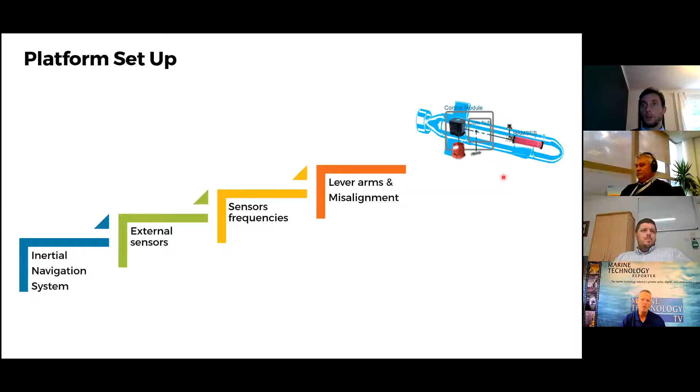Now you can go to the trajectory. So what will be my survey pattern along my mission? You define a trajectory and we generate navigation sensor data along this trajectory. A trajectory starts at an initial position with angle and speed changes. And once the user has declared this trajectory, we add some information to have a more precise trajectory definition.

And finally, we generate some perfect data along this trajectory for the internal sensors of the IMU, the fiber optic gyroscope and the accelerometer, with all the compensation required. And we also generate external sensors, whether GNSS, USBL, or other aiding sensors.

But that's not the end. Obviously, here it's perfect data. What we look for is a simulation result which is really representative of what will happen at sea. All the sensors have some specificities that have to be taken into consideration to have simulation results in line with what could happen at sea. So here we are going to add realistic errors.

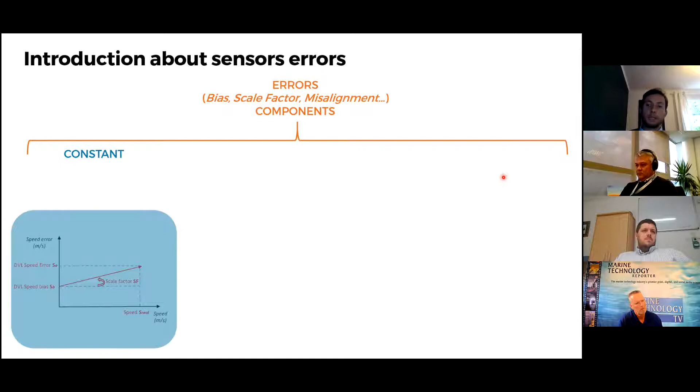And just a small word about the type of errors. We can mention bias, scale factor, misalignment. They have some components; some of them are constant. For example, when I have a DVL, an acoustic speed sensor, if the vehicle is purely static, will my DVL tell me that I'm static? They also have some random components. Typically, an acoustic USBL system can have this type of white noise error component. And some of the errors are time correlated.

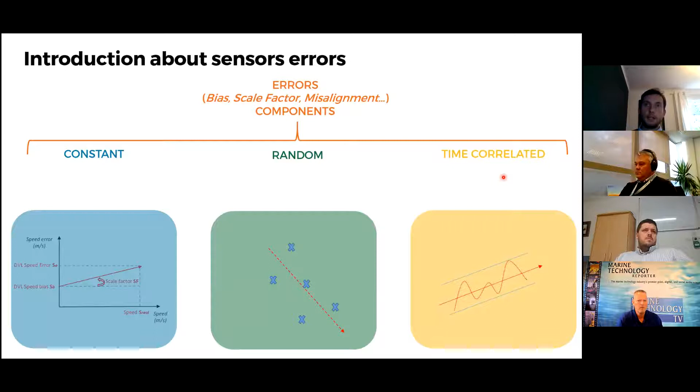So just to say that when we start from the perfect data generated over the specific trajectory and we want to arrive at a simulated value, we perform several operations. At each time, for each sensor, we inject realistic error based on error models that we develop. And we find again here the different types of errors that we mentioned before. So that's how we achieve a simulation which is really representative of what will happen at sea.

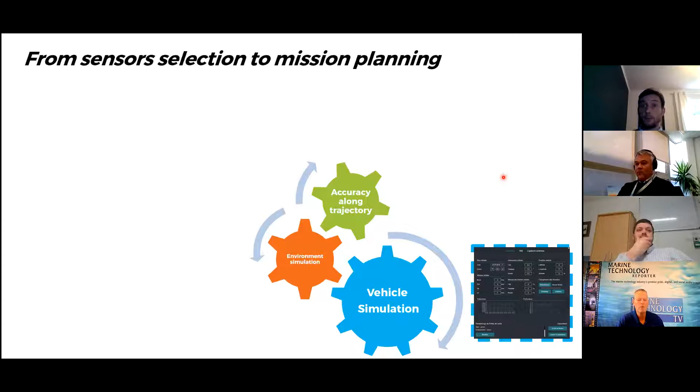The benefit of that is obviously that I can perform my vehicle simulation: the navigation sensor architecture on board my vehicle, and, very important, the specific trajectory of my vehicle during navigation, and the availability of the aiding sensors during navigation. Maybe I can have some loss of USBL sensor, some loss of DVL sensor.

I will also be able to simulate the environment where my survey area is located. For example, if my AUV navigates sometimes in sparse LBL mode, I can upload into our simulator the bathymetry and the sound velocity profile to simulate the area insonified by this aiding sensor. So here we also speak about environment simulation.

And finally, I will be able to see the accuracy of my navigation all along the mission. That means I will know if the data I collect during my mission will have the proper level of accuracy when it comes to georeferencing those data.

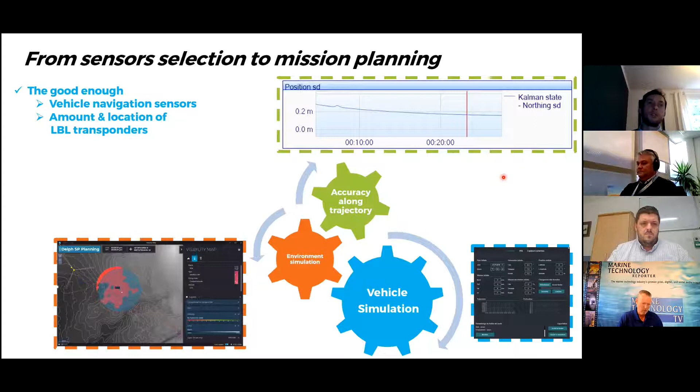So, to sum up, a simulation solution is really about selecting, upstream, the right navigation sensor and also the aiding sensors. It's about converging faster on the best navigation strategy.

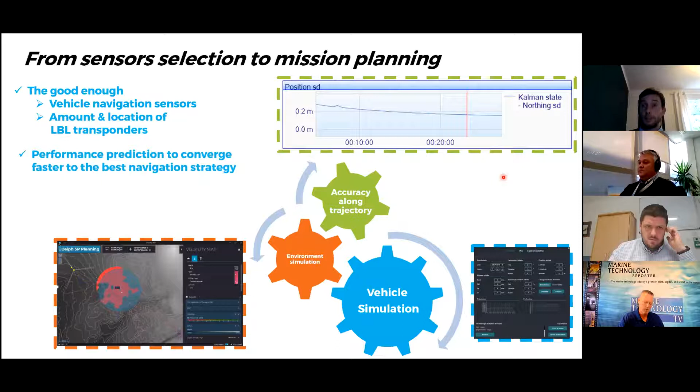And finally, when it comes to developing a new vehicle, we can think, for example, about resident vehicles, which are more and more common in the energy industry. We will help to qualify the vehicles while limiting sea trials. So it's basically helping innovation by reducing the cost of qualification. Well, I think we've arrived at the end of my presentation.

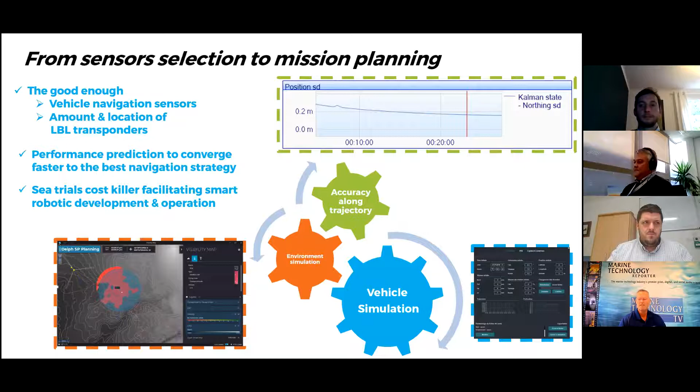So just let me present SBG Systems. We are an inertial manufacturer, so we are providing inertial solutions, mainly based on MEMS technology. And we have designed some miniature systems, and those systems are integrated quite often with various sensors for survey purposes, especially in the marine industry for hydrographic survey. And we have some customers that are surveying in more and more challenging areas where positioning can be problematic even when we are on the surface with some GNSS reception.

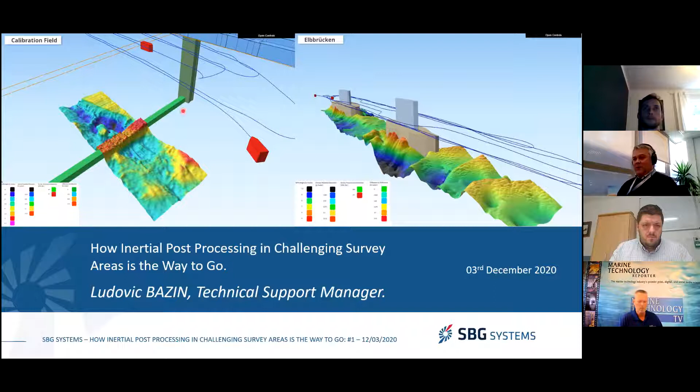So I'm going to present first how we reach a high level of accuracy through post-processing. Most of the time, post-processed kinematics can deliver absolute centimeter precision using GNSS phase and range measurements by a double difference algorithm. To achieve that, you need to use a base station that can be either a single base that a user has installed, or some source of base stations from CORS. And the advantage of post-processing is that you can perform offline processing, meaning that you don't need any communication links while performing your survey.

The other advantage of post-processing is that you can have absolute accuracy of your base station coordinates, because you can check and control them through a PPP static position. And also, in some post-processing software, you are able to perform tight coupling, which is a specific positioning and processing method.

So the ultimate performance with INS PPK also improves roll, pitch, and heading performance thanks to different methods. The first one, as I was saying before, is that you can perform a tightly coupled GNSS INS solution, which means that we reprocess entirely a solution using the raw GNSS data and raw inertial data to improve the position. But there is also a forward, backward, and merge processing mechanism that will improve the accuracy, especially in areas where you have GNSS outages and in rough areas. So it improves position robustness in case of RTK or GNSS outage, and it also greatly improves heading in mono antenna setups with MEMS systems.

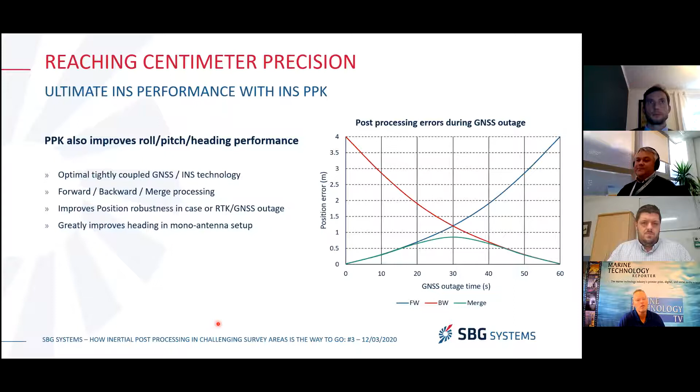So one of the other advantages is that you can extend your RTK capability with post-processing, thanks to different methods. First, precise point positioning, which is commonly called PPP. You do not need any base station to compute a solution with that. You can have worldwide and free of charge corrections that are available after your survey. But one of the drawbacks of this correction is that you need a convergence time of about 30 minutes to reach centimeter accuracy. So you have to think, when you are performing a survey, to have at least 30 minutes of acquisition before being able to use the data set for survey.

The other method to extend those capabilities is to use a virtual base station concept, commonly called VBS. This method consists of using multiple base stations around your survey area. And the advantage of this method is that you can have base stations up to 100 kilometers from the area you are working. We model and map atmospheric disturbance at the rover location thanks to this network of base stations. So you can reach RTK positions, centimeter precision, with an RTK-like convergence time. So that's very efficient in that case.

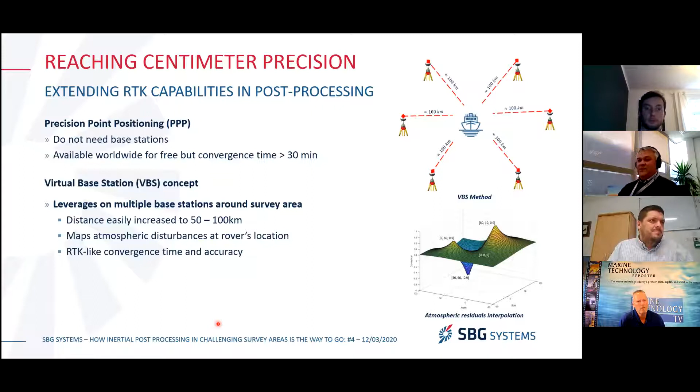So this is an example of how we handle virtual base station in our post-processing software, Qinertia. The advantage is that it's ideal for long corridor mapping, because you can use several base stations, so you can perform a survey over a long distance with only a single processing session. It's highly flexible and robust, because you can mix field base stations that users install, but also base stations provided from a local or area network. And it works with all GNSS manufacturers.

You can mix GNSS manufacturers, and the base position adjustment is automatically performed. Then the software will automatically find the best network for the area you're working in, using the base stations and data sets that are available. It will automatically download the data, and you also have quite a lot of QC indicators.

So we're going to focus now on a case study to show results you can obtain in real time and in post-processing. What we did last year is a survey. We did some acquisition in Germany, in the Port of Hamburg, with one of our partners, MacArtney Germany. We performed acquisition in 3 different areas in the Port of Hamburg. One area was open sky, just to see the performance of the systems in a survey application in an open sky area. Then we did a bridge survey, so we went under bridges and performed acquisition using multibeam echo sounders.

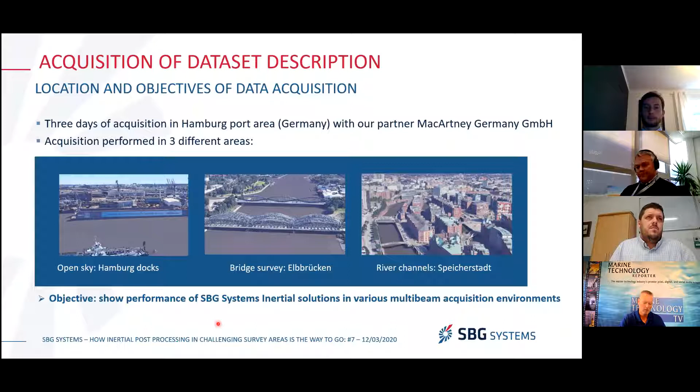So this is a brief description of the data set we used to perform this study. We rigged a small vessel equipped with a multi-beam echo sounder, a SeaBat 7125. We had acquisition software to perform the recording and logging of the multi-beam acquisition. And then we installed four different inertial sensors onto the boat, going from entry-level systems up to a high-performance FOG closed-loop system. So we installed an Ellipse D, an Equinox, an Apogee, and a Horizon.

For this study, we decided to compare the performance of all the sensors to the reference sensor, which here is the Navsight Horizon, a closed-loop FOG system. And we used a post-processed PPK solution of the Navsight Horizon as a reference for position.

But we have also computed and generated multi-beam data using each solution, and we have compared those multi-beam data to the data set we obtained with the FOG and with the FOG post-processed solution. All the results are available and accessible on the SBG Systems website. But for this presentation, I will be presenting only this specific data set.

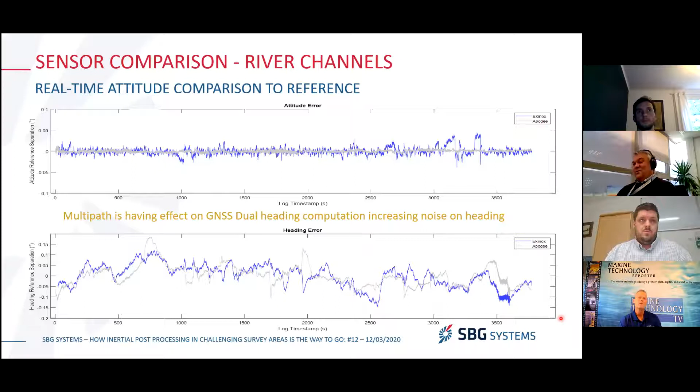But if we start looking at the heading, we see that there are variations of heading in such an area. One of the main points is that the MEMS systems we are using are based on dual GNSS heading computation. And with dual GNSS heading computation, you have the same effect as for position. In multipath, you have some noisy data being computed because it's using the same mechanism of computation. And it impacts the heading results, which are not good enough for some accurate survey acquisition.

If we look now at the results on the position, if we compare the real-time position to the reference system, with RTK corrections broadcast in real time during the acquisition, we can see that there are quite big differences and quite big jumps in position that make the position solution not usable for the acquisition and to produce a proper multi-beam data set.

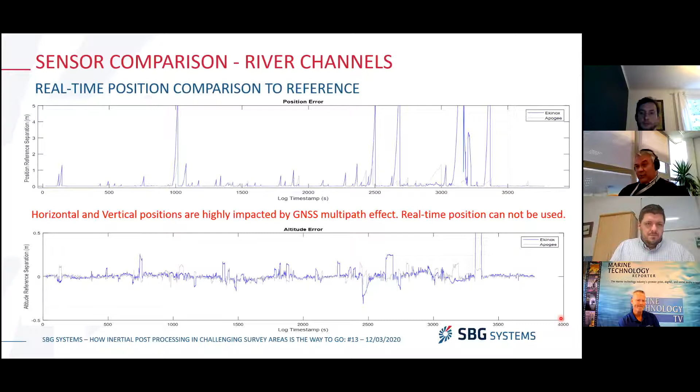So if we look now at the PPK solution and the difference in performance we are having for attitude, pitch, roll, and heading, we can see that there is a visible improvement on heading, but also a slight improvement on the attitude, thanks to this forward, backward, and merge processing. It's really a way to achieve the highest level of performance you can have with any system by performing the post-processing.

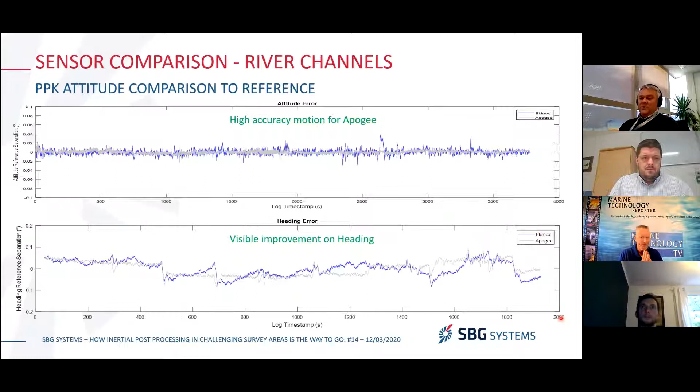If you look now at the position errors, you can see that from several meters of errors, we are down now to 30 centimeters for the Equinox, that is the mid-level sensor. And even for the Apogee now, we have everything below 10 centimeters. So we managed to reach a good level of accuracy by processing the inertial data set for almost all the systems. So it's really a very big improvement for position.

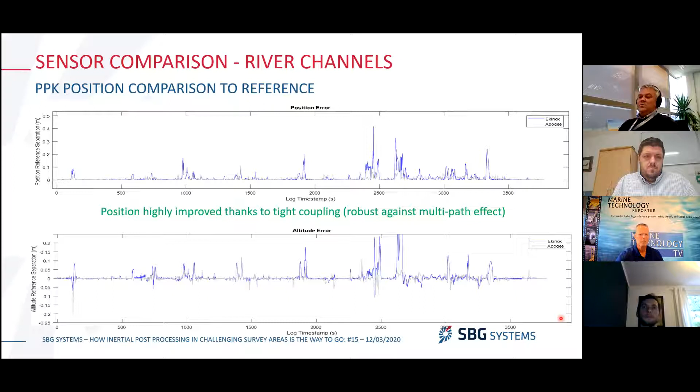This is thanks to the tight coupling post-processing method, that is very robust, especially when you have multipath, and then also thanks to the mechanism of computing a forward and backward solution that also improves the results at the end.

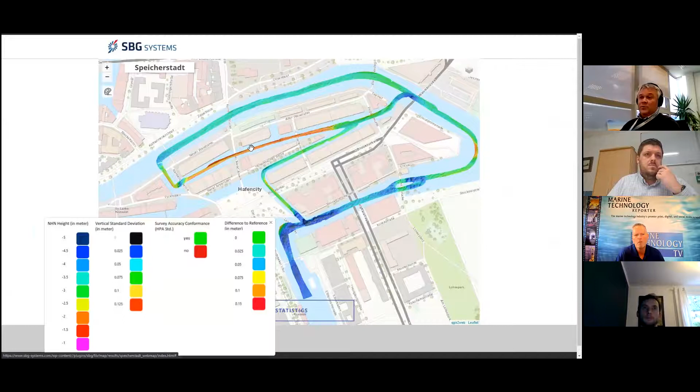So now what I'm going to show you is just the impact on the bathymetry itself, because for most people and surveyors, at the end, they are not really looking at the performance of the inertial sensor itself, but really at what impact it will have on your data set at the end. So we produce the bathy maps on our website, and they are all available. And for each data set, you can have a look at the bathymetry itself, but also standard deviation and conformance, which correspond to some confidence level you can have on the bathymetry itself.

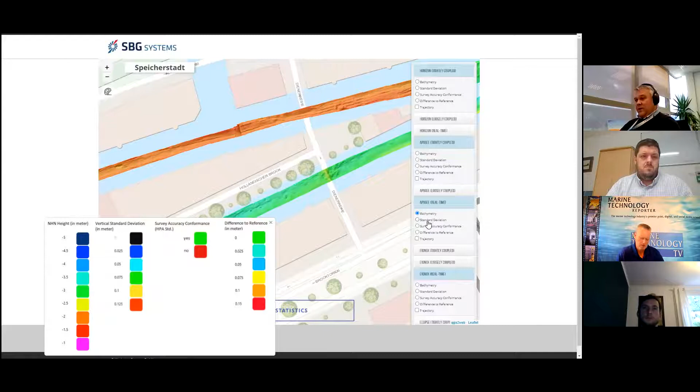So the data set I'm presenting here is the one from the Apogee, which is the higher grade MEMS sensor we can have so far. If we look at the bathymetry, we can see that we have some glitches in real time. And if we look at the standard deviation now, part of the standard deviation is above 15 centimeters, and we have part of the data that are not really usable to produce a bathy map or a survey map at the end. We can also see on the conformance, which is the confidence level you can have on your data acquisition, that you don't have a very good level of accuracy.

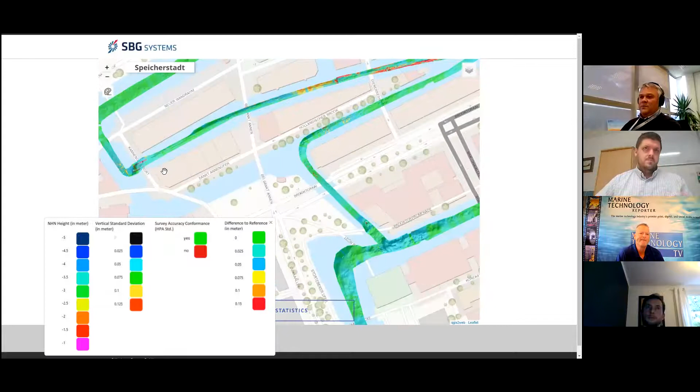If we look at the difference now of the bathymetry towards the reference system, we can see that we had more than 15 centimeters differences in some areas, especially this area here. In most of the areas where we had bridges or other areas where we had strong multipath effect, this happens.

So if we look now at the bathymetry on the same area, but after post-processing the inertial data, we can see that we have a significant improvement on the standard deviation, but also on the confidence we can have in the data set itself. The conformance starts to be very good, and the difference to the reference system is very small, and you can have a fully usable data set that is perfect for such acquisition.

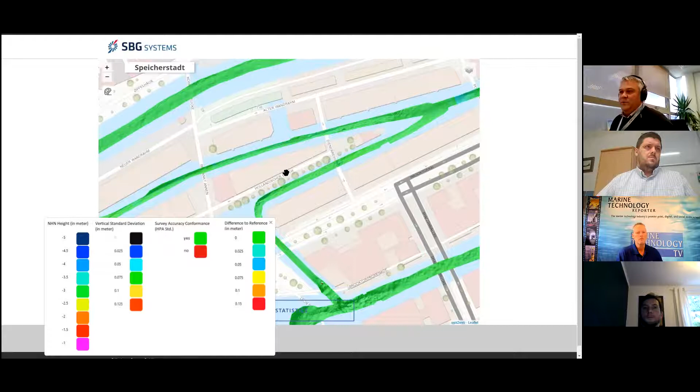So let's go back to the presentation now. So here we have an overall results performance summary of the different systems. We can see that for both systems, the Ekinox or the Apogee, in real time, the motion, pitch, roll, and heading are providing acceptable results. But as soon as we go to the position, the results are a bit too noisy and cannot be used as such for acquisition.

So you really need to post-process the data, especially for the position, to reach a good level of accuracy, and that allows generating multibeam data conforming to the IHO special order. The performance of the IMU is still noticeable, but the post-processing is really a very big improvement for that.

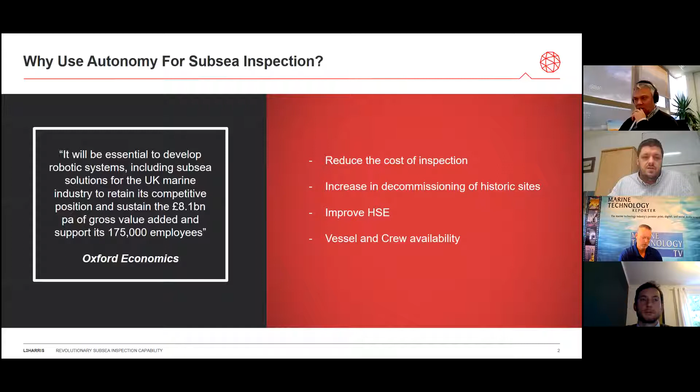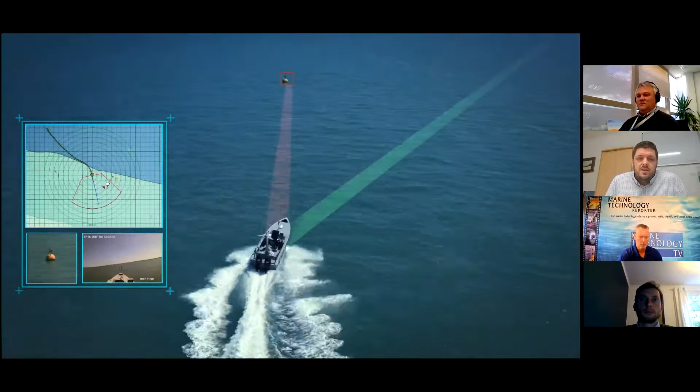So as I say, we've been developing these systems for a number of years, and have an industry-leading autonomy system capable of doing a wide range of things. We're constantly innovating, from just the simple autonomy of remote operations all the way up to advanced autonomy. So you can see in the video here a vessel tracking using camera systems. And then what I'm going to talk to you about today, the Arise system phase 1, is on the screen now. So how do we integrate an ROV into an existing platform and then use that to do useful inspection work?

And we developed a whole range of different vehicles from 3 all the way up to 13 meters, in both the military and commercial world. So mine countermeasures, border security, as well as hydrography and survey.

So to talk a little bit more specifically about what we've been doing. This is a 2-phase program. In the first phase, we did a relatively simple integration, where we took a lot of equipment that we had around a simple winch system, a payload in an existing vessel, and integrated that with about 40 meters of tether to enable us to just go out and prove the concept. How can we, in as simple a way as possible, integrate an ROV into an autonomous vessel so that we can start moving towards this collaborative autonomy?

Because at the moment, we're looking at an ROV that's around the size of a Saab Seaeye Falcon. That's what we've used in phase 1 of the program, and what we're going to be using to do demonstrations early next year. That's traditionally operated off a vessel that's anywhere between 25 to 35 meters long. So going from that size down to 7 meters is a significant step. And if you look at things like carbon emissions, you're reducing them by up to 97% by making that step. This system can use as little as a couple of liters of diesel an hour, which is vastly different to a lot of crew transfer vessels that are using these ROVs for inspection work at the moment.

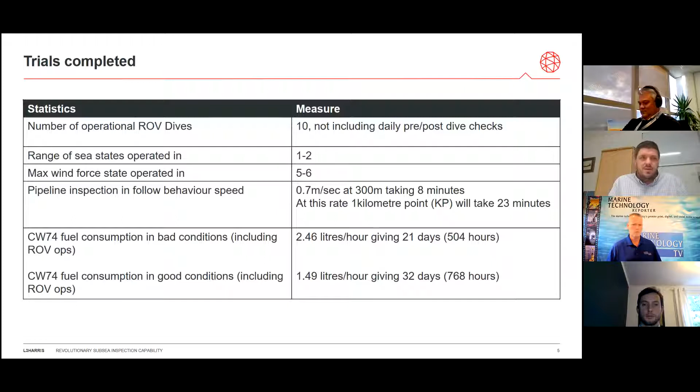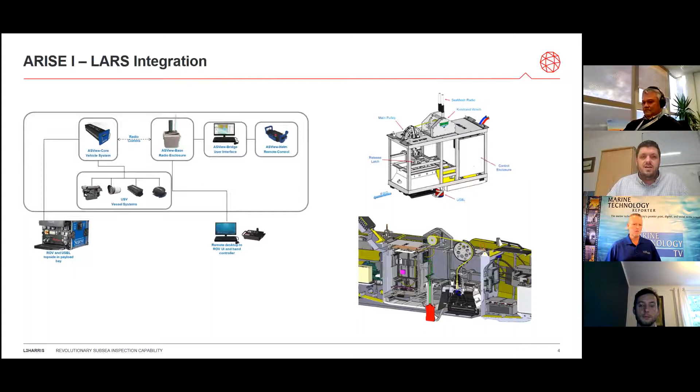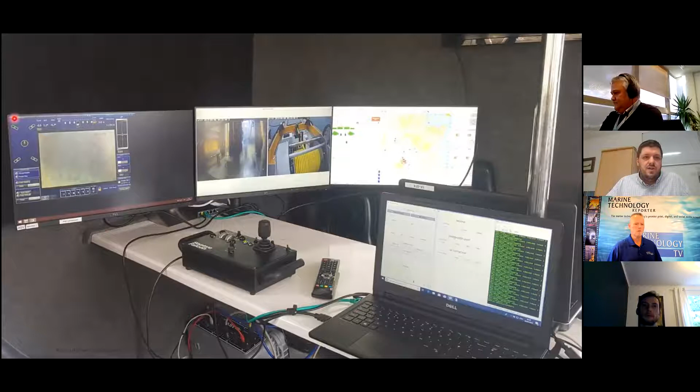So the control system, relatively simple. So we had a desktop here for the winch control, hand controller for the ROV, remote desktop into the ROV system, so giving camera feedback, details on thrusters, more cameras, because the critical thing we found was actually controlling that tether and making sure that we weren't getting any wraps on the winch or anything like that. And then finally, our control system in the background there, giving that overview of charts and where we are in the world at that time.

So, as I say, a relatively simple system which could be mobilized quite easily, even in this kind of prototype format. But as I say, this was a prototype, and we only had about 40 meters of tether on board. So this is what the system was looking like. This is the wonderful trials area that is the Solent. So whilst good for us to trial the launch and recovery, deploying the ROV repeatedly to ensure it was operating appropriately, it was terrible for doing any actual demonstrations of inspection because the water is a bit like mud.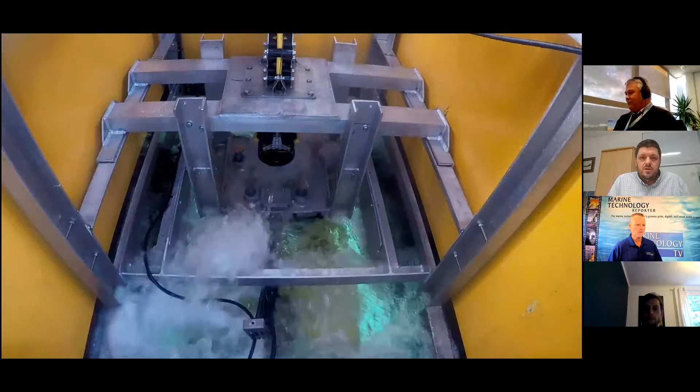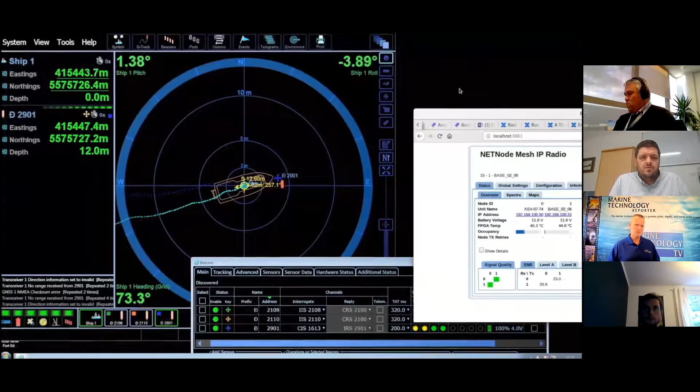So we moved down to Plymouth to give it a trial, and also worked with an organization called Abyssal to do some visualization with the project partners BP, so they could actually visualize what was going on in their head office. Actually in Plymouth, in Cawsand Bay here, the water was much clearer, so we can even see the ROV coming out of the housing underneath the vessel, just behind the USBL system there. And then we got some beautiful imagery of sandy mud. And if you looked really carefully, there was a small crab there, but that's about all we saw, unfortunately.

Did a bit of inspections of quaysides whilst we were getting ready, but really just get the system out there, demonstrate capability, and enable us to move on to the phase 2 program that we're operating now. And really the phase 2 program is very much around hardening this system and taking it to the next level. Our goal was always to get to around 250 meters of tether, enabling us to operate down to about 200 meters water depth. And the reason behind this is that would enable us to access about 80% of the North Sea. And with access to 80% of the North Sea, this suddenly becomes a really useful tool.

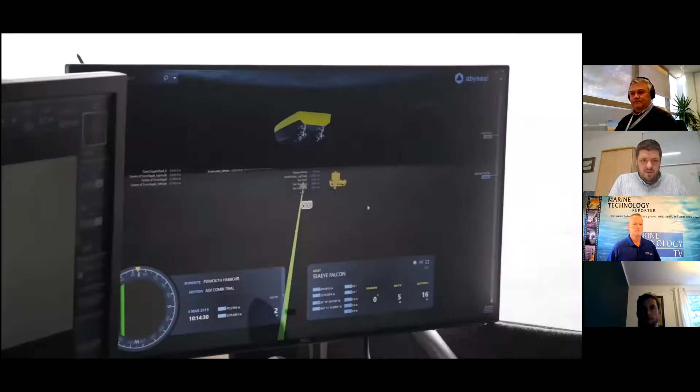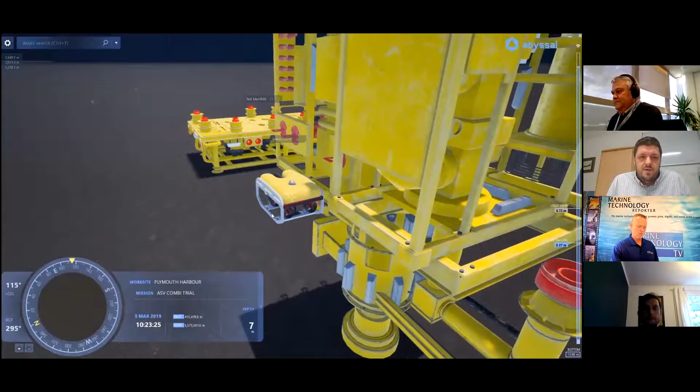Offshore wind, obviously most of that in the UK, or 99% of it in the UK, is less than 60 meters water depth. So that would be able to access all of that. And also the vast majority of oil and gas projects would be within that as well. So a really successful project. You can see the Abyssal system here, which was doing real-time observations. So what we did with this is simulated some oil and gas infrastructure on the seabed and trialed the inspection of that. So that enabled us to move on to the second phase of the project.

And in the second phase of the project, we were going to design and build the ROV LARS system, working with the University of Exeter, who are going to model the ROV and ASV interactions to ensure we're not going to get any loads that are too high on that tether, and how we're going to recover that system into the ASV. And then we were also supported by BP as industry partners. This was a follow-on project with Innovate UK, so they're providing a lot of government funding to this, so it was brilliant.

And as I say, the goals for Arise 2 were significantly higher than Arise 1, so we were going for over 150 meters of tether. Goal was 250, but it just wasn't practical in the space that we had. We're also looking at a significantly larger ROV if possible. For trial reasons, we are going to stick with a Falcon, but it is capable of taking something up to about the size of a Tiger and some other systems that are out there. And also the ability to provide much more power.

One of the challenges we know that we're going to face in the commercial environment is the speed of the tide and ensuring, certainly in shallow waters, that we can stem that tide and actually complete our inspection work. And that's why a more powerful ROV system is really extremely useful.

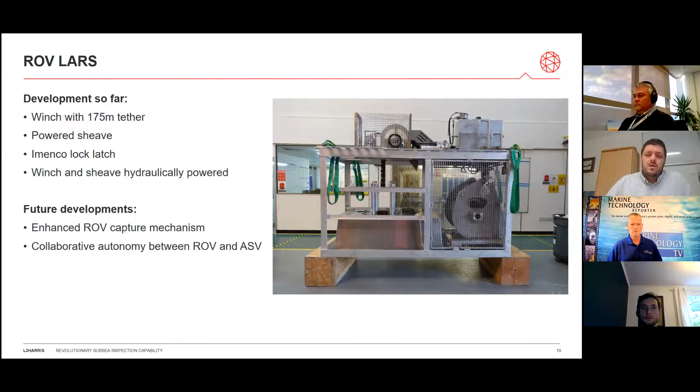One of the challenges this did create for us is that in the original Mark 1 system and in most of our 7-meter boat payloads, we have a rack system that sits in this section. But as you can see here, that's currently filled by a large winch. So we had to find an alternative location to store the electronics. Now, luckily, we had a bit of space in the bow and in the stern of the vessel.

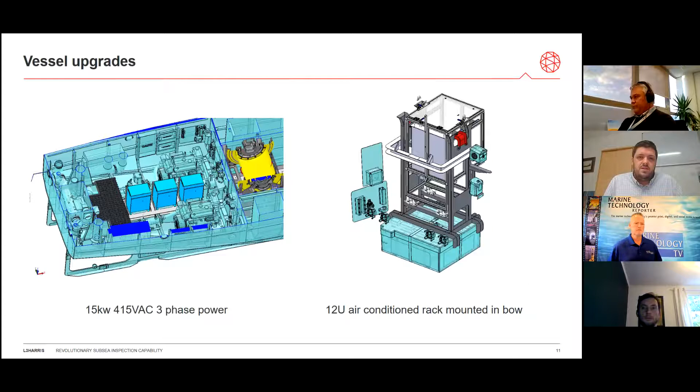So in the bow of the vessel, we're fitting a 12U rack system with air conditioning so that we can take all of the ROV top sides in there. And in the stern of the vessel, we're going to fit a set of inverters to be able to give us the 3-phase 15 kilowatt power. So we've actually made significant progress with this. Unfortunately, due to where we are with the pandemic and trials, it's taking longer than we'd hoped, but we will be out early next year gathering data and trials in real world environments.

So going back to where we started, why are we doing this? By reducing man days offshore, we can increase health and safety; especially in the current pandemic times, we can mitigate some of the challenges that's creating. By moving from what would traditionally be a 35 to 40 meter vessel doing this work to a 7-meter, we can significantly reduce both the capital and operational costs. And then a much lower environmental footprint, 2.5, maybe 3.5 liters an hour during operations. It's a significant improvement on where we were.

And also we are working off a base vehicle that is a really high TRL. This system has operated around the world and is extremely robust. So we know that we're building on a strong technological footprint.

So where does the future lie with this project? Well, early next year, we will be trying this in shallow water inspection applications. Down to about 70 meters is the goal for both integrity inspections and environmental inspections. And then we're also looking at what the future holds in terms of larger ROVs for bigger scopes of work. So can we do the work of, say, a 70 or 80 meter ship with something like a 24 meter ship? So really looking to the efficiencies of this and how autonomous systems can support operations in a more cost-effective way than we look at it at the moment.